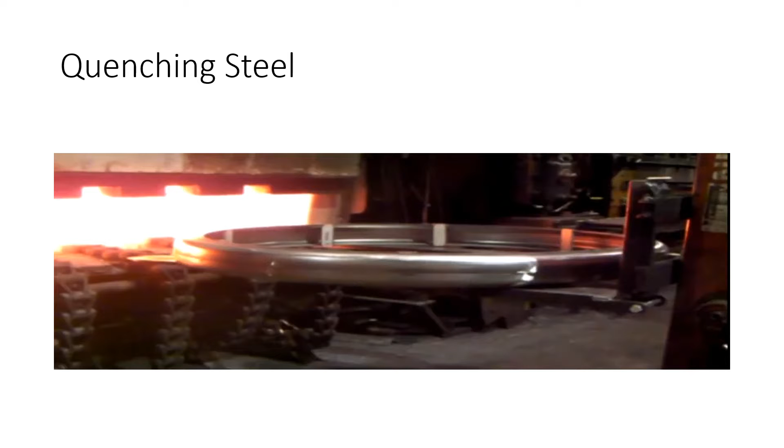As I have explained before, the goal of quenching is to cool steel from austenitizing temperature quickly enough to form martensite. But before I proceed with the explanation, I would like to show you this video clip here showing how liquid quenching was performed. Quenching is a metal heat treatment that is performed in order to alter the microstructure of steel, often from austenite to martensite.

As we know, the microstructure of steel is what determines its hardness and strength and also its toughness. So before quenching can be done, the steel must first be heated to alter its microstructure back to austenite. After soaking it at an elevated temperature for a period of time, complete austenite will be developed in the microstructure and it will be removed from that elevated temperature.

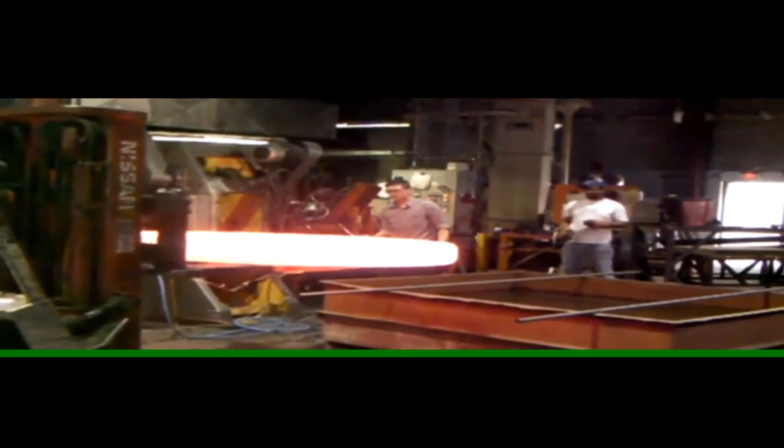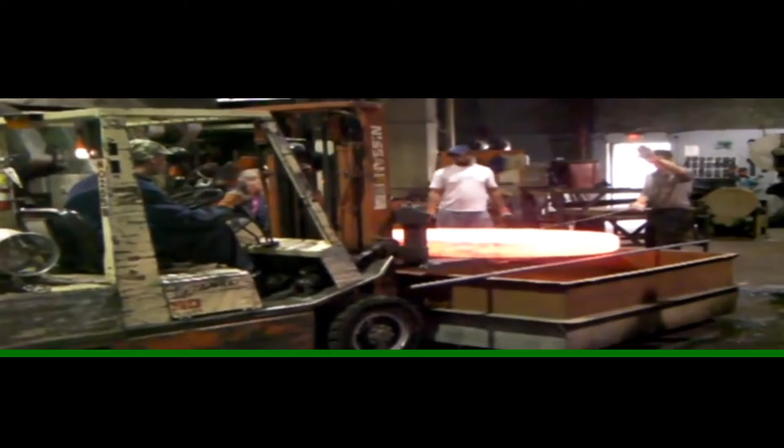So during liquid quenching, the temperature of this metal must be rapidly cooled, and this can be done by dropping it into a liquid in order to transform its microstructure from austenite to martensite. So you will see in a few seconds that the quenching process will be performed on this steel.

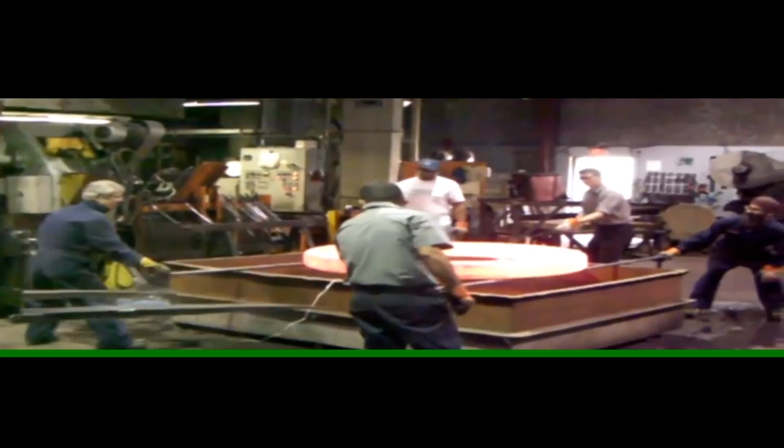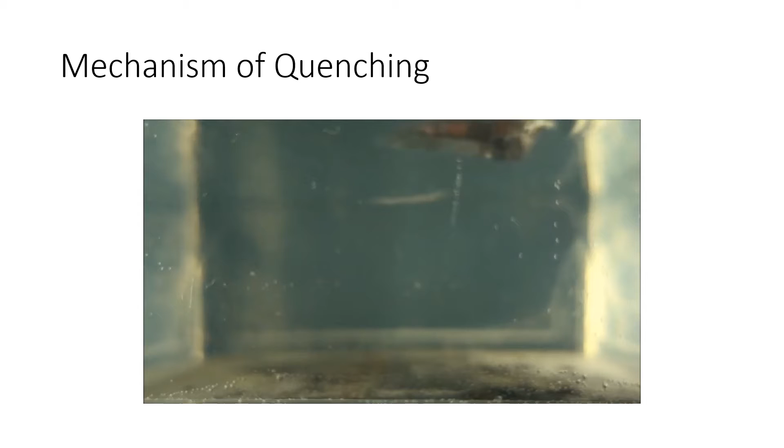When a hot component comes in contact with a liquid quenching medium, there are normally three stages of quenching. The three stages of quenching are the vapor stage, boiling stage, and convection stage. So here is what happened during those three stages.

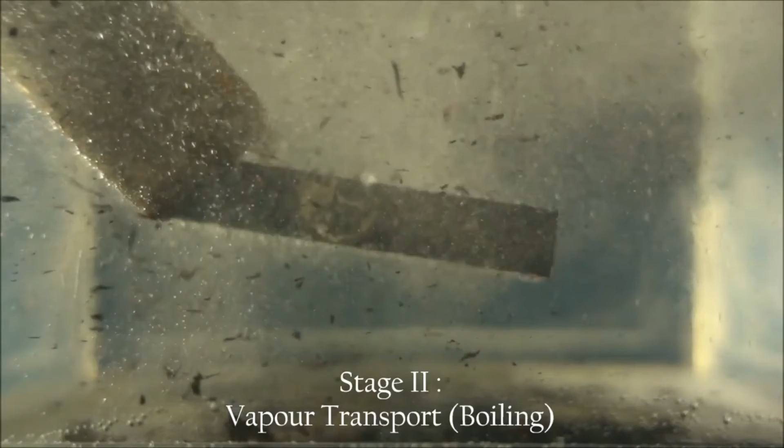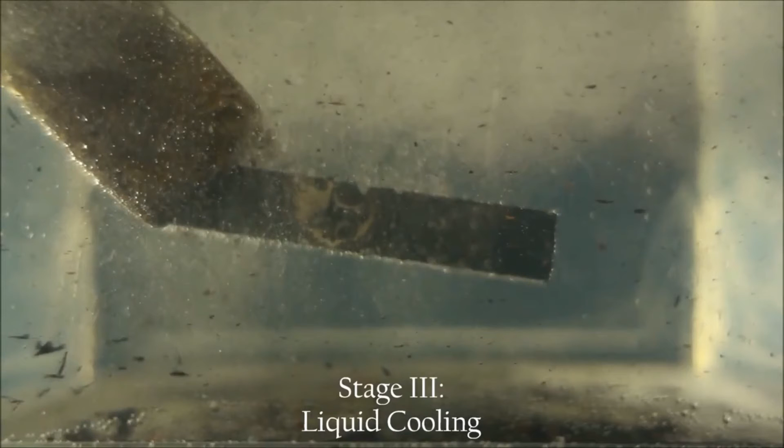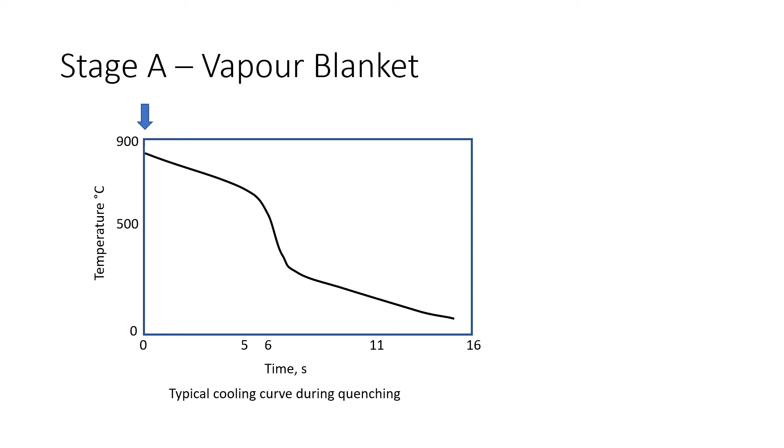This is a typical cooling curve during quenching. Immediately after the start of quenching, the coolant or quenching medium will get vaporized due to the metal being at high temperature, and a continuous vapor blanket will envelop the surface of the object. Now, no liquid can come in contact with the metal surface, and heat escapes from the hot surface very slowly at this stage by radiation and conduction through the layer of vapor, through the liquid-vapor interface.

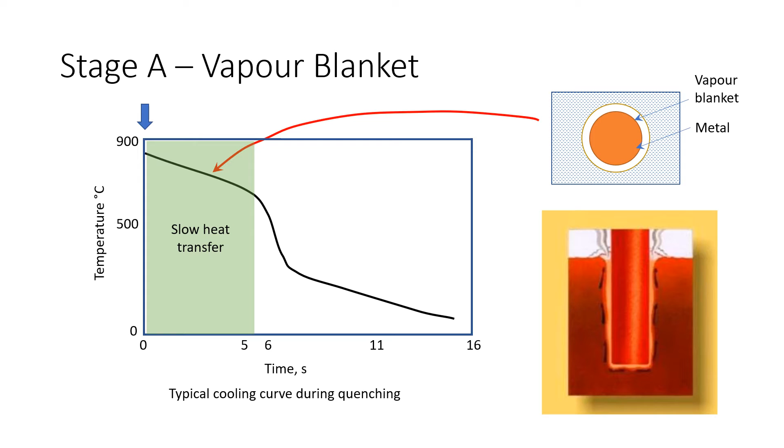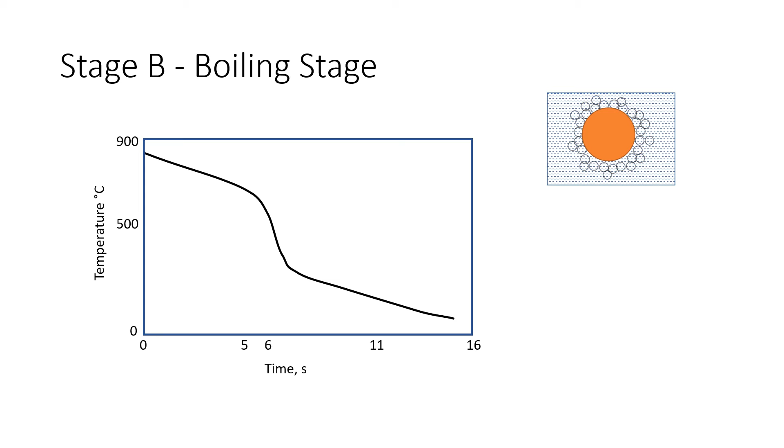Since vapor films are poor heat conductors, the cooling rate is relatively slow at this stage. Ideally, the vapor phase will be as short as possible to come up with steel with high hardenability. During the boiling stage, the vapor blanket is broken intermittently, allowing the coolant to come in contact with the hot surface at one instant, but soon being pushed away by the violent boiling action of the vapor bubbles. The bubbles are carried away by convection currents and the liquid touches the metal again.

Heat is removed very rapidly at this stage as the heat of vaporization, as indicated by the steep slope of the cooling curve. The rapid cooling in this stage soon will bring the surface below the boiling point of the quenching medium. The vaporization will then cease. Steel in the austenitic condition transforms most rapidly at this stage.

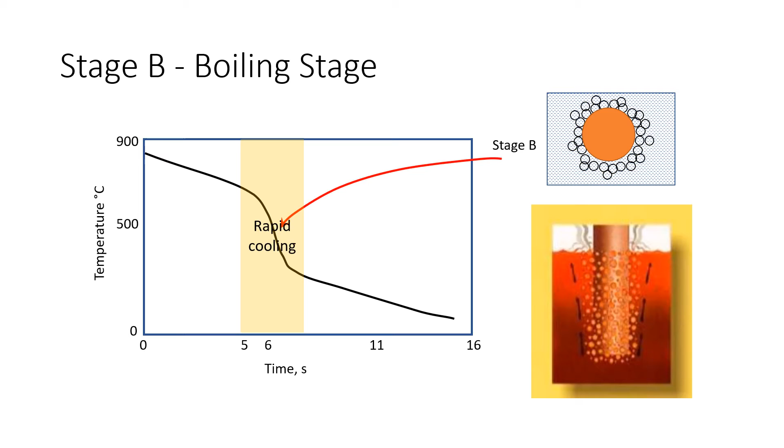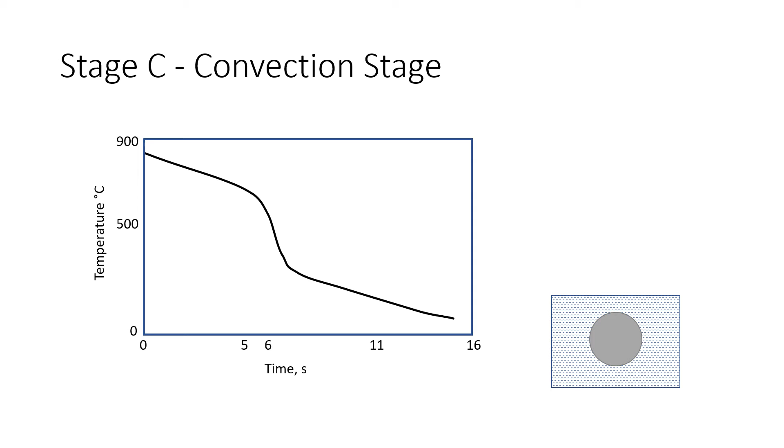The convection stage begins when the temperature of the surface of the object decreases to the boiling point or below the boiling point of the quenching medium, and this will prevent any more formation of vapor. The cooling is due to convection and conduction through the liquid. The cooling rate is at the lowest at this stage.

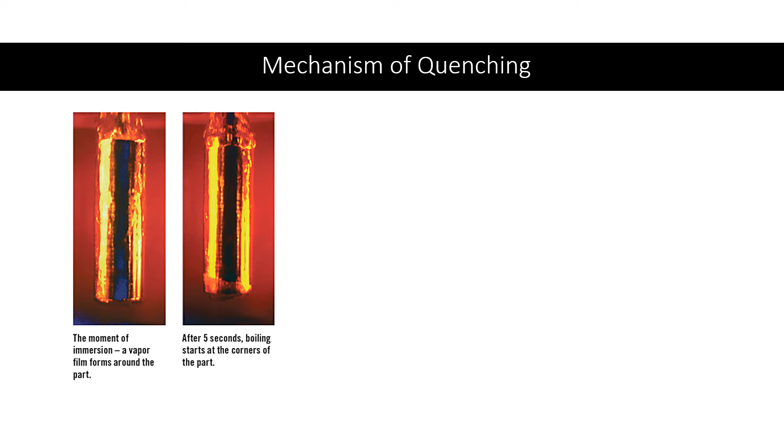I will now show you the still images sequencing the mechanism of quenching. The moment the heated object is immersed in the liquid, a vapor film can be seen forming around the object. After 5 seconds, boiling starts at the corner of the object. And then after 10 seconds, the boiling front moves along the object. After 15 seconds, all three phases can be seen.

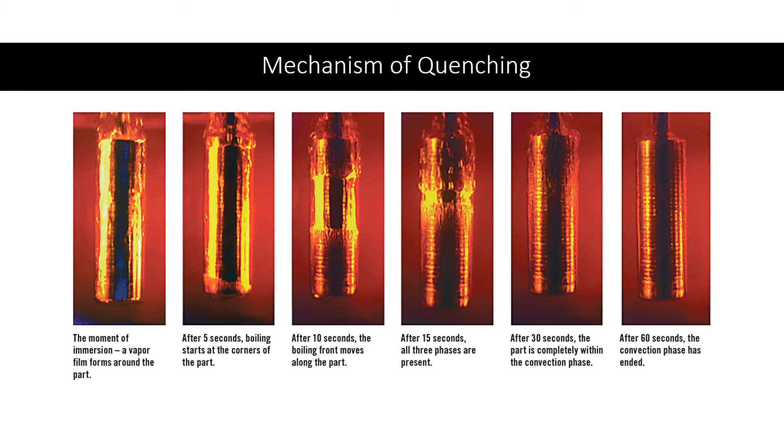Some part of the object starts to cool down. After 30 seconds, the part is completely within the convection phase. And after a minute, the convection phase ended. It can be observed that the three phases of quenching can occur simultaneously on the part.

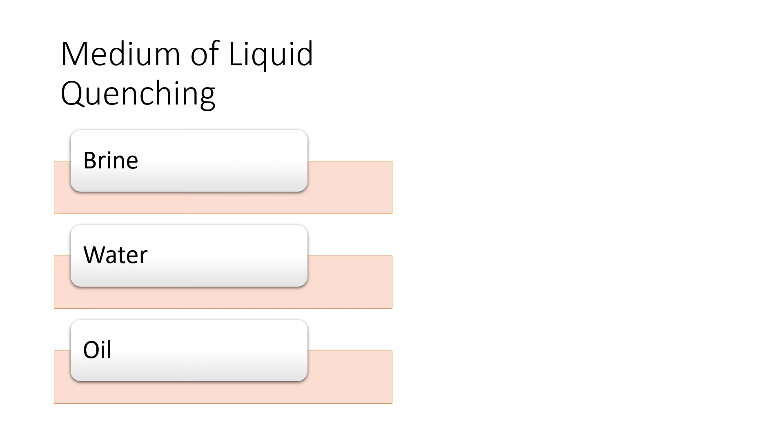As I have mentioned previously in the lecture video, there are three mediums of quenching in heat treatment of steels, and these are brine, water, and oil. Quenching in salt water or salt solution often will result in steel with the highest hardenability. Why? The addition of salt will assist in breaking up the vapor blanket, and therefore the coolant or quenching medium will come in contact with the hot surface of the metal quicker.

During quenching, crystals of salt are deposited on the surface of the steel. The localized high temperature will cause these crystals to fragment violently, and this will create turbulence, which will destroy the vapor film, and this will give the highest maximum cooling rates. This means that a lot more austenite will be transformed to martensite, which is hard in nature compared to ferrite and pearlite microstructures.

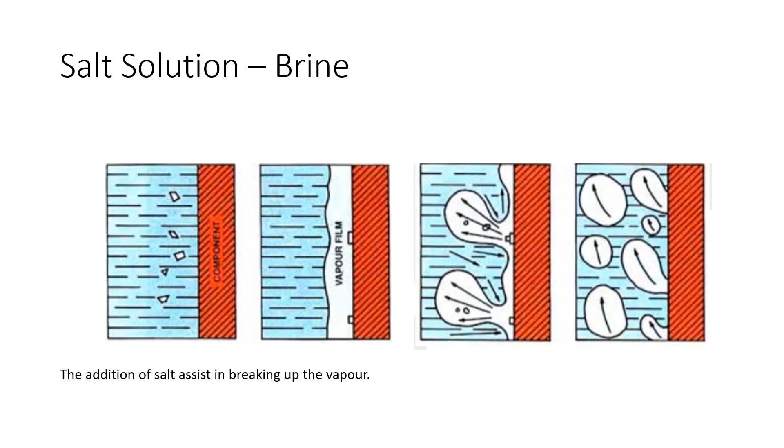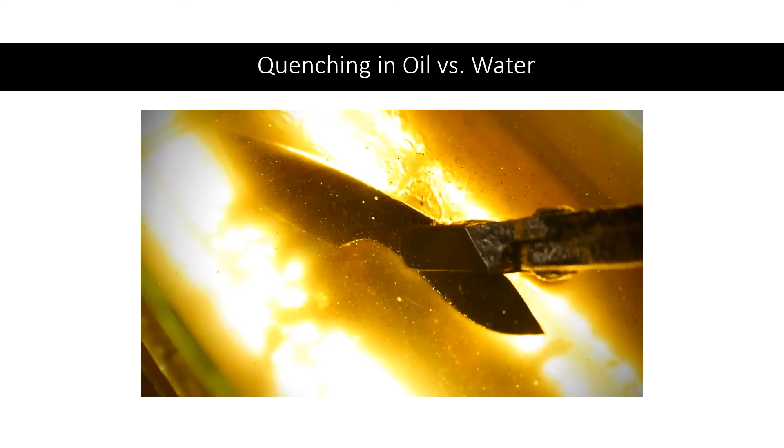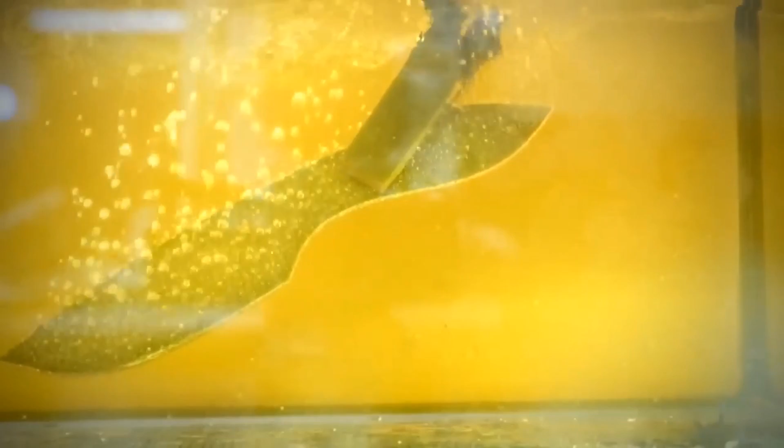On the other hand, why does quenching in oil exhibit the slowest cooling rate between the three mediums? The quenching velocity of oil is much lower than water. This is mainly because the thermal conductivity of water is higher than the thermal conductivity of most oils, and this will result in faster removal of heat from the hot material if it's quenched in water. And this is why water has a better quenching efficiency.

The faster the cooling, the greater the suppression of diffusion of carbon in the crystal lattice, and therefore more martensite transformation will happen. Subsequently, it will improve the hardness or hardenability of steel. Before I end this video, I would like to emphasize that there is no perfect method for the selection of quenching medium. Each medium has its own merit, and depending on the steel alloy that you want to heat treat and the resulting mechanical properties that you want, the choice of quenching medium often involves experience.